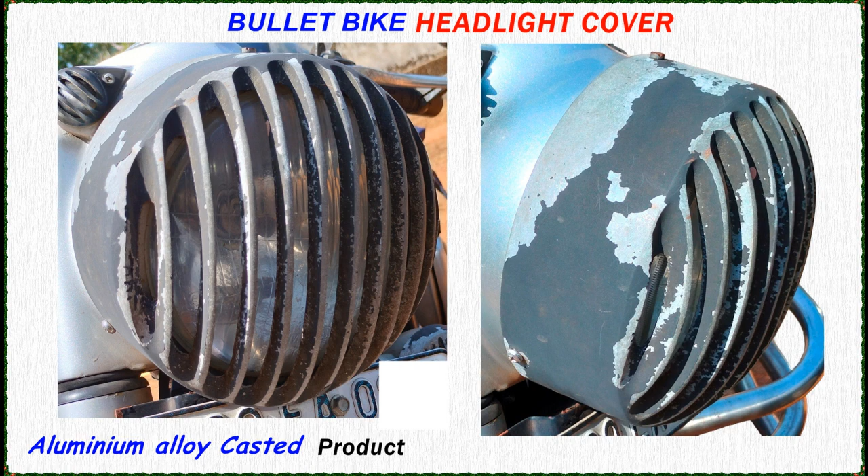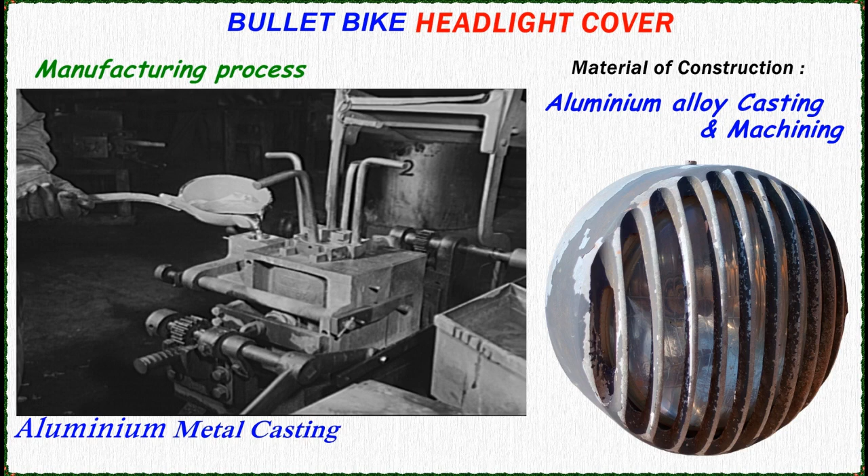My 3D certifications. This is a Bullet Bike headlight cover, which is an aluminium alloy casted product. You could see the picture of metal casting for reference, and the material of construction is aluminium alloy. Here you could see the approximate overall dimensions in mm of the headlight cover.

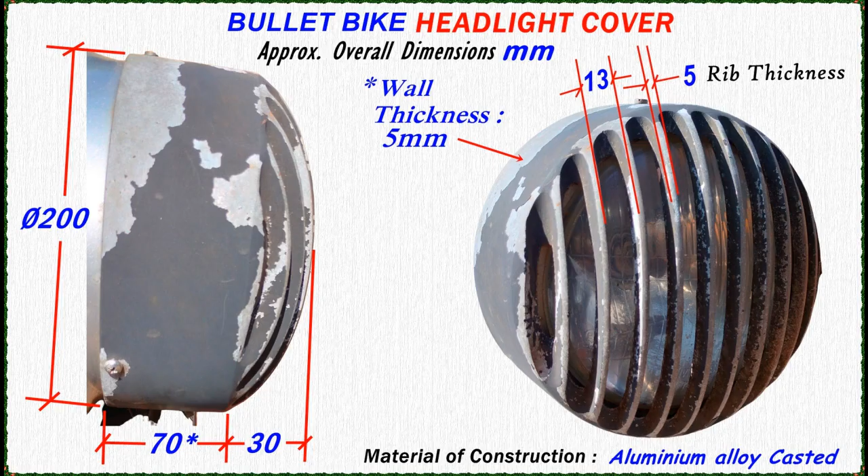We do 2D and 3D trainings for students, pre-visualizing the final 3D design with the real and actual picture.

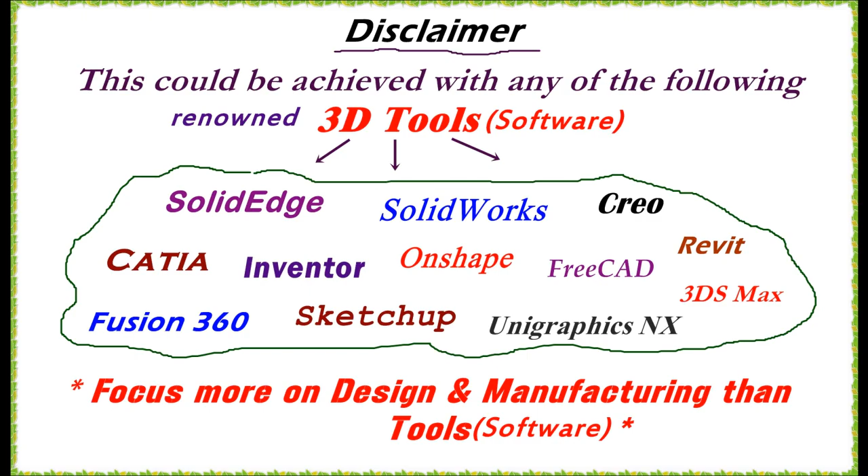Let's begin the sketch for the back portion of the cover. Dia 200 by 70 by 5 mm thick. Let's solidify it with revolution.

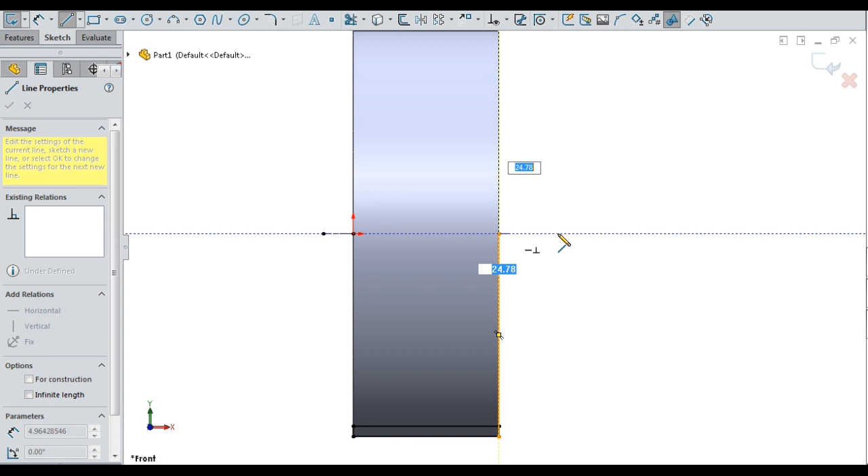Let's begin the sketch for the front portion of the cover, sketching a couple of lines and a spline. Solidifying the front portion with revolution, the disjoint piece.

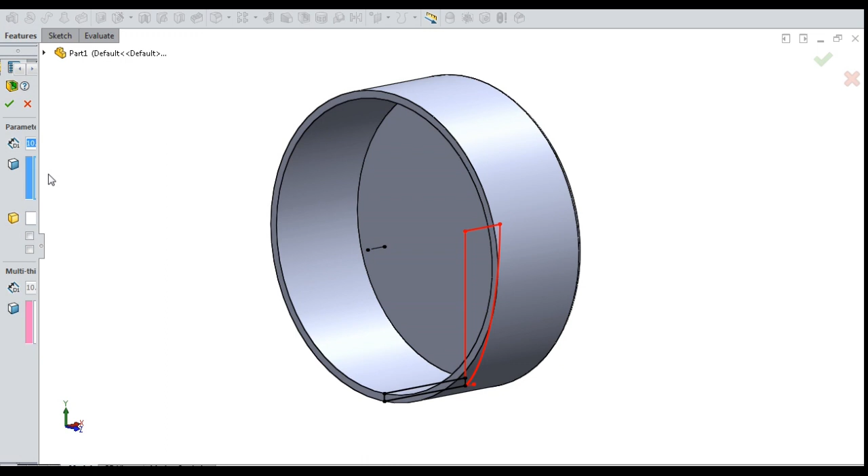Hollowing the front disjoint piece to a wall thickness of 10 mm. Sketching slots for front cuts of 13 mm wide and 5 mm thick ribs.

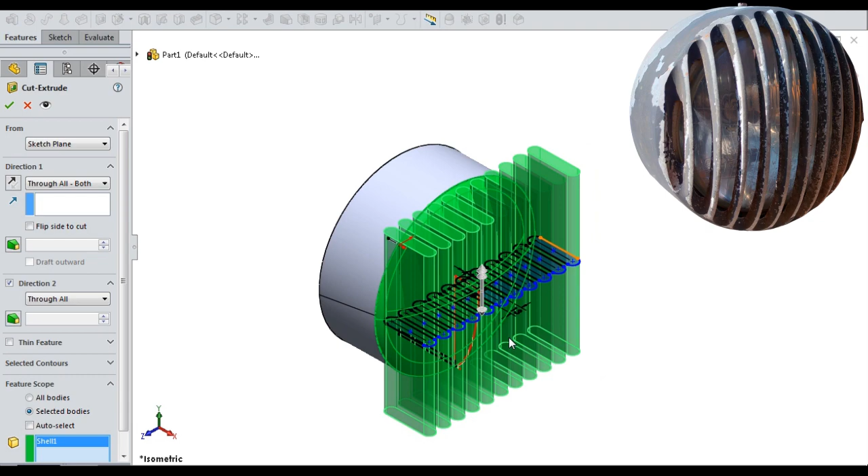Making the cover front cuts vertically through and through. Sketching slots for front horizontal cuts.

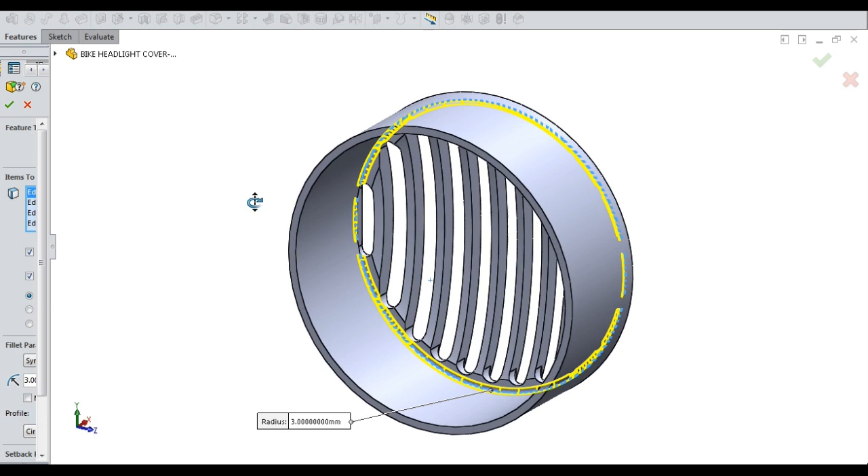Making the front horizontal cuts through and through. Applied internal fillets.

Drilling a hole for the M5 mounting screw and replicating it to 4 numbers.

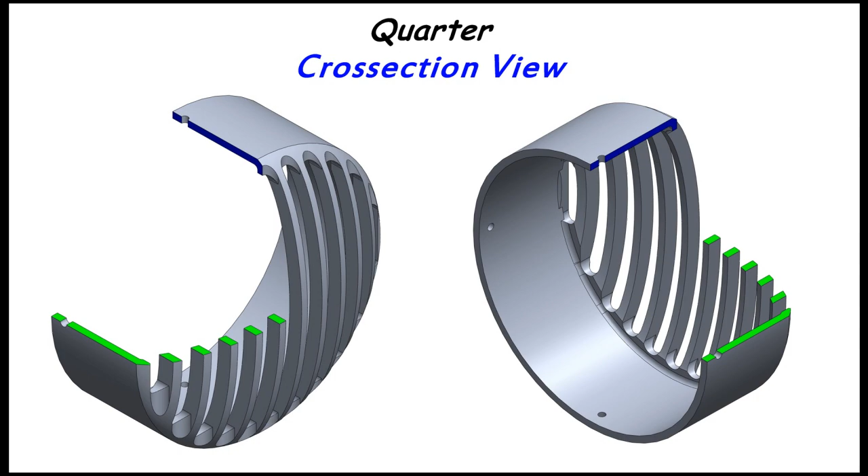Viewing a quarter cross-section view of the model. Aluminium C355 T61 cast material applied. Approximate weight 860 grams.

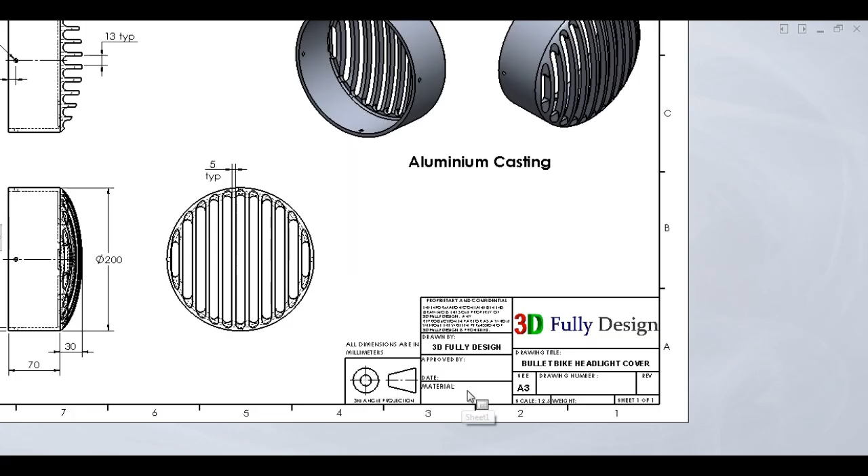Detailing done for product manufacturing, which is made on a 3D Fully Design template. Finally, realistic rendered images of the bullet bike headlight cover.